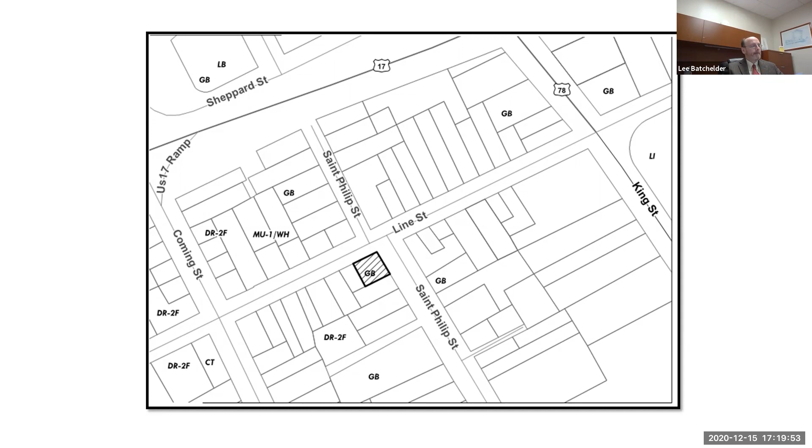Moving on, here's a zoning map. So you see that general business is the zoning for all properties that front on St. Philip in that area, and Line Street in that immediate area. And that GB zoning extends all the way over to King Street and further east. So this is an area with a mixture of uses, lots of residential units, and some other non-residential uses as well, because of the commercial zoning that is allowed.

In this case, the applicant is requesting your approval to build a single family residence on this lot. Now, it's zoned commercially, so it is entitled to conversion of that residential unit to a commercial short-term rental unit, but it's also basically a dwelling unit that can be used that way, but doesn't necessarily have to be.

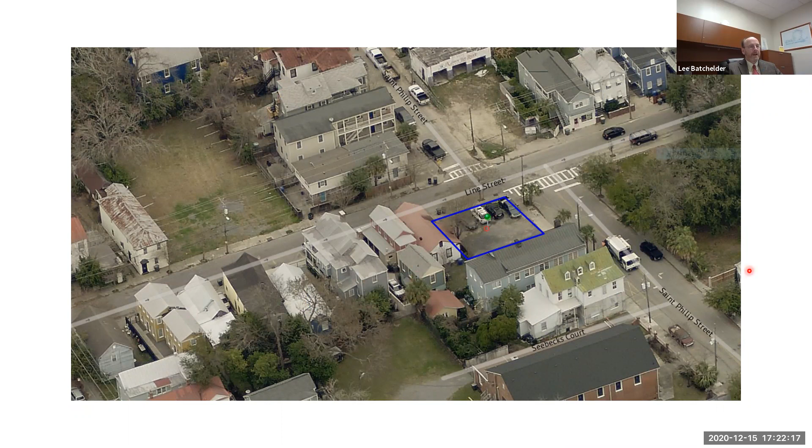Again, here's a view of the property in question. I should point out on this aerial view that you see a lot of other houses in this immediate area, on lots of a similar size. As I move the cursor around, this house over here on Line Street, 79 Line Street, is on a lot that's probably smaller. This is a residential property on a very small lot, and other lots of similar size have residential uses on them, although they're zoned commercially.

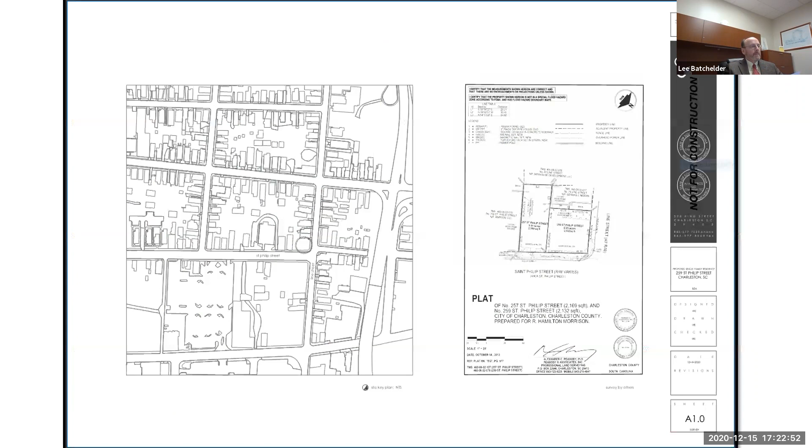This is a site plan showing the lot in question on the left and the proposed site plan on the right. Now I'm going to skip to the next slide, a blow up of the image on the left, to explain this. St. Philip Street runs along the bottom of the screen, and Line Street is on the right side of this plan.

This shows the setback lines required by the zoning ordinance. There's no front setback requirement for the house. There's a 3-foot side setback along the north side property line and a 7-foot side setback required on the south side, and a 3-foot rear setback. The south side setback makes sense given there's a house on the next lot over the south side property line, consistent with the pattern of development where homes are sited close to one side property line and have a larger side yard on the other. So this is how our zoning works.

This triangle shows what we call a vision clearance triangle. When you have a corner property at the intersection of two streets, the zoning ordinance says you can't build anything between a height of 3 feet and about 10 feet within the vision clearance triangle. It measures 15 feet on each leg, and you connect those two points, creating an area where visual obstructions for drivers approaching the intersection are to be avoided or prohibited.

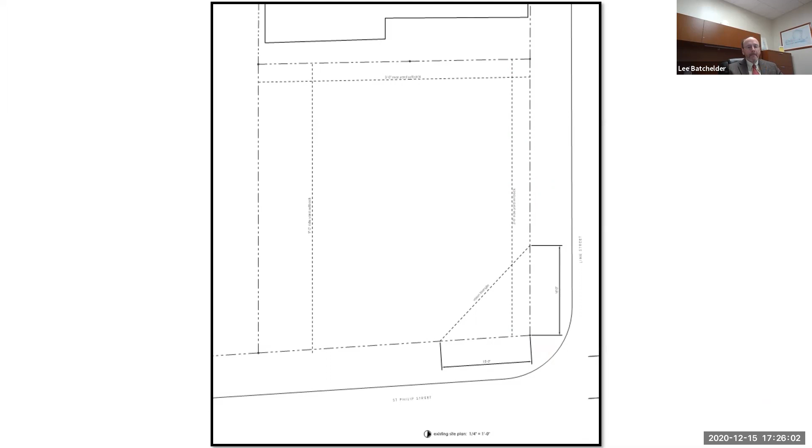Here you have a proposed site plan showing the house that meets the rear setback requirements and the south side setback requirements. However, it proposes to align the house along that north side property line within that 3-foot setback area. So that's the variance listed on your agenda.

The second request is to allow this single family residence to be constructed on a lot of insufficient size. As I pointed out, the lot in question, 259 St. Philip Street, is comparable in size to other lots in the immediate area that do have single family homes on them.

Moving on, this is the design proposal, and I should go back to that site plan floor plan. What's happening here is this is covered outside space on the ground floor, with columns at these three locations so that someone can still look through there and see oncoming traffic on Line Street. That's the purpose of that, and that proposal went before the Department of Traffic and Transportation staff, and they found it to be acceptable.

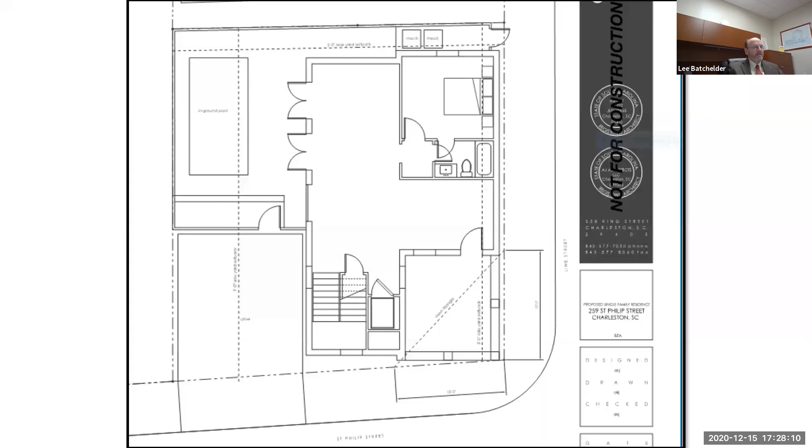So that resolves that vision clearance triangle issue as far as the city is concerned. These are the floor plans. Here's that open area with the front door right here.

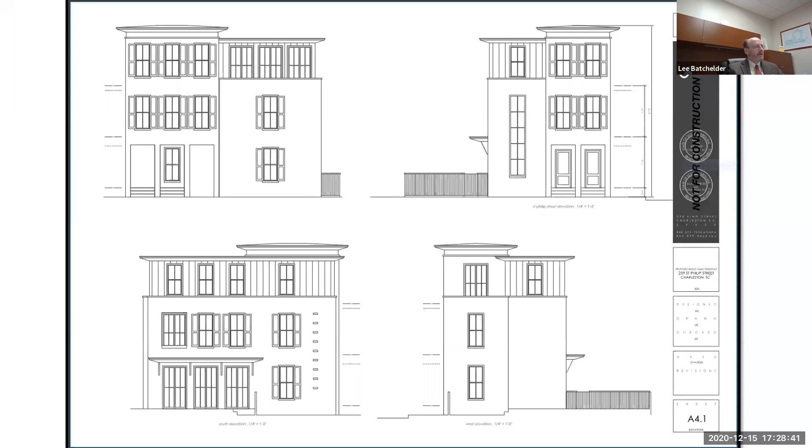And then we get to the elevations right here, showing the proposed design of the house, which will require approval of the Board of Architectural Review before it can be built. So the design may change. It may, I'm sure it'll get more detailed and evolve, but that is the proposal.

And then if I go forward, so these are just some views of the surrounding area. And here's a larger view of the actual corner property. It's been used as a surface parking lot for a number of years, and not a very attractive use, so a house would be a much nicer use of the property.

And again, the lot of insufficient size gives the board the authority to approve a site plan deemed not in conflict with the intent and purposes of the ordinance.

And then the applicant submitted with their application the information about how they feel that they meet the variance test. We agree with their findings here that the intent is to locate the residence along that north side property line abutting the street, so there's no setback. That's the preferred option. And in fact, in this case, they went to the neighborhood association and they have a letter from them indicating that they support this request, and that is from Andrew Gould of the Neighborhood Association.

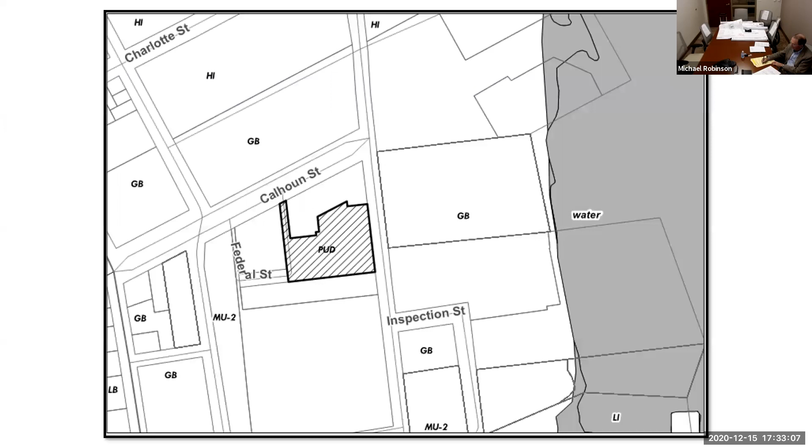Mr. Batchelder: So the applicant is requesting another extension to this vested right that was approved originally a number of years ago. And as I've mentioned before, the law allows a vested right to be extended up to 5 times, provided there's been no change in the ordinances that would preclude or prohibit the proposed use, and that is not the case here. The use is still allowed.

This is a property that's within the accommodations overlay zone. It's actually, the property lines have changed a little bit over the years, but it's actually this piece right here, which is owned by the same people that own this piece, the neighboring piece right here. And that piece on the corner of Calhoun and Concord Street is 7 Calhoun Street. And the approval was originally for a 100-room inn.

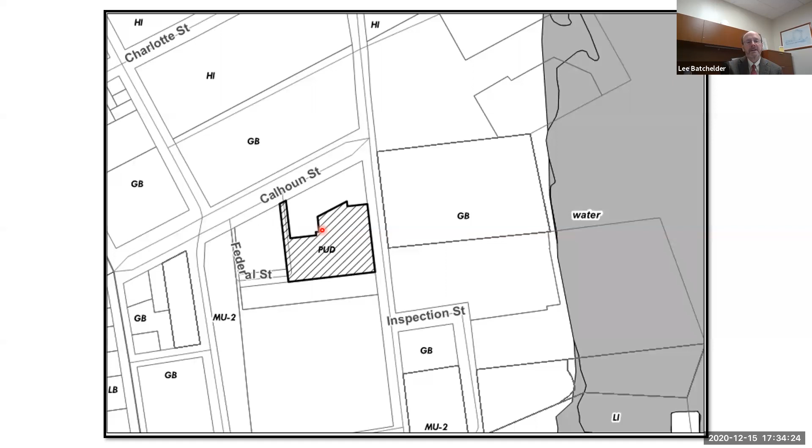So nothing has changed that would prohibit that use from being built today if they wanted to move forward with that project. And we recommend the approval of the vested right, the extension of the vested right to carry it through December 31st of 2021.

The city recommends approval. Ms. Ashby, is anyone present who disagrees with the city's position? No, Mr. Robinson, no one is present. Does the board have any questions for city staff, or are there any motions?

I'll move for approval. Second. All those in favor signify by saying aye. Mr. Morrison, Aye. Mr. Judon, Aye. Ms. Grass, Aye. Ms. Richards, Aye. Ms. Vargas, Aye. Mr. Bennett, Aye. Mr. Robinson votes aye. The motion is unanimously approved. Thank you very much.

Third item on the agenda is item B2, 15 Broad Street. Request a third one-year extension of a vested right pursuant to section 54-962 to extend the approval to December 31st, 2021. The vested right pertains to a variance granted under section 54-301 on June 21st, 2011 to allow 3 dwelling units, with a condition the ground floor can't have any residential use in a limited business zone district.

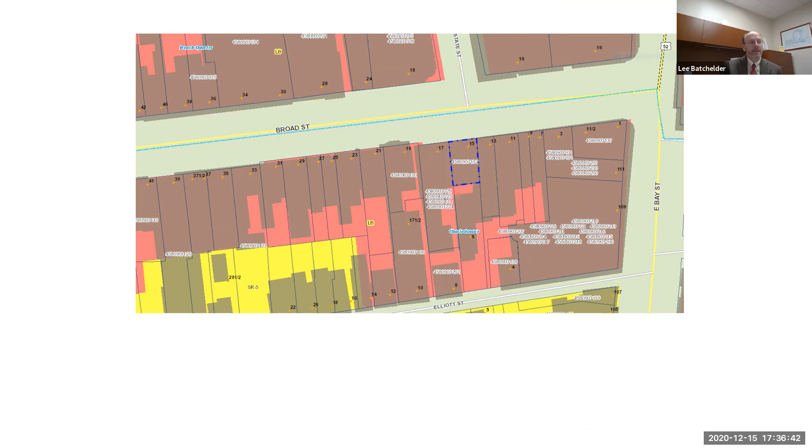The extension is being requested to extend this approval through 2021, until December 31st, 2021. There have been no changes to the zoning regulations that would prohibit or preclude this use, so we recommend approval of the extension. Staff recommends approval. Ms. Ashby, is anyone present who disagrees with the city's position?

No, Mr. Robinson, no one is present. All those in favor signify - any questions, any motions? I move for approval.

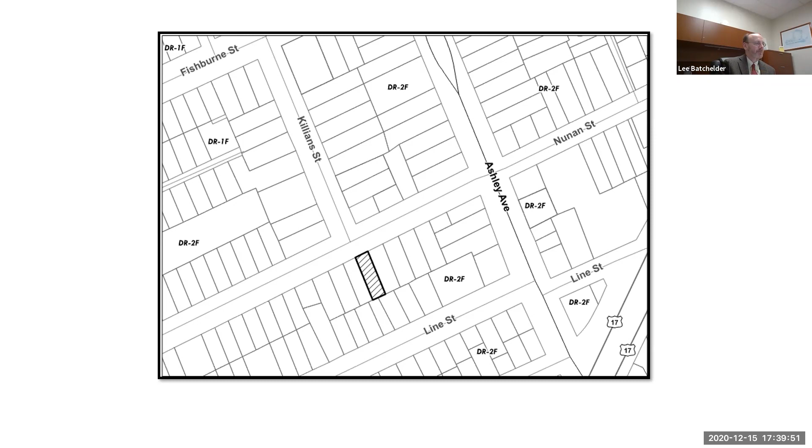31 Nunan Street is a residential property in the West Side neighborhood, located just west of Ashley Avenue. The property, as you can see, is similar in size to the other properties on Nunan Street. Here's a zoning map, and you see the existing building on Nunan Street and the existing residential buildings on the other streets in that area.

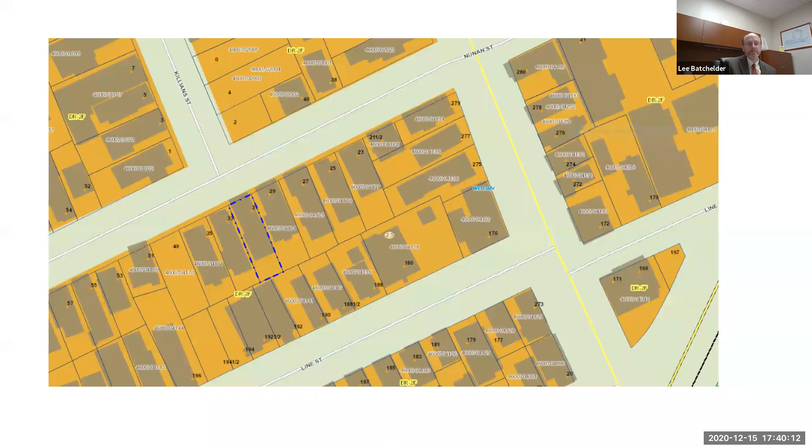The applicant is requesting these approvals to allow him to elevate this one-story house to meet the flood zone requirements, which are pretty significant in this area. In doing that, they are not going to change the footprint of the building except to add stairs to access the elevated one-story house. They also want to make changes to the back portion of the residential property.

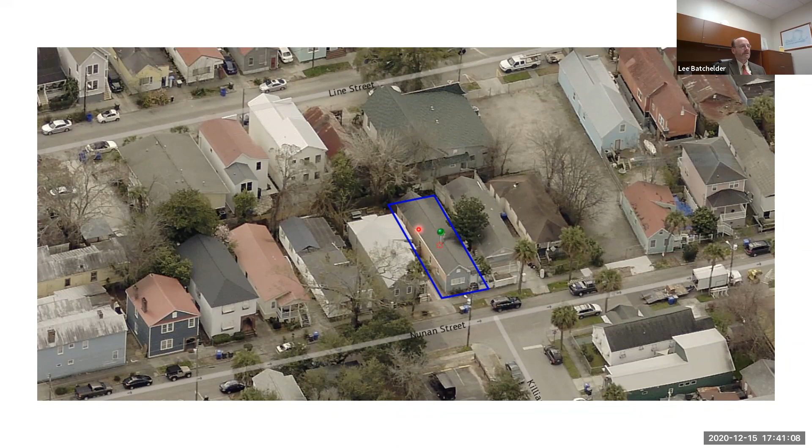So the original house is the front portion, and then there was an addition in the back. I think they are proposing to essentially rebuild that addition in the same footprint, but make some modifications to enlarge the living space. Here's a view of the house from the street.

Existing site plan - this line right here is the lot line. You can see that the house sits right up on the east side property line right now, so there's virtually no setback on that side of the property.

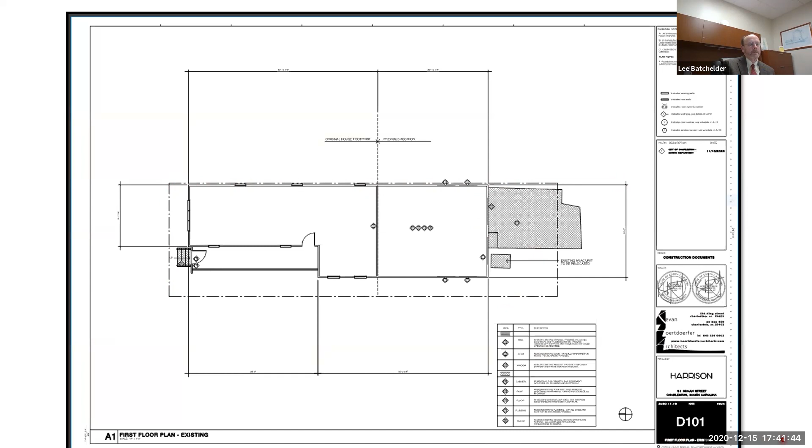This is the proposed site plan. The footprint doesn't change except with the addition of the stairs right here, and these stairs are what require the variance, to allow the stairs with a 2-foot west side setback. The setback over there right now is already just a little over 4 feet, so that stair addition will end up reducing the setback in that immediate area around those stairs, but other than that, it will remain the same.

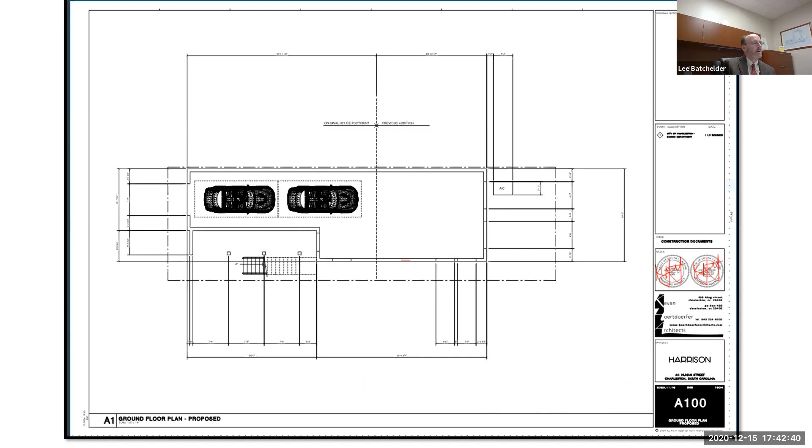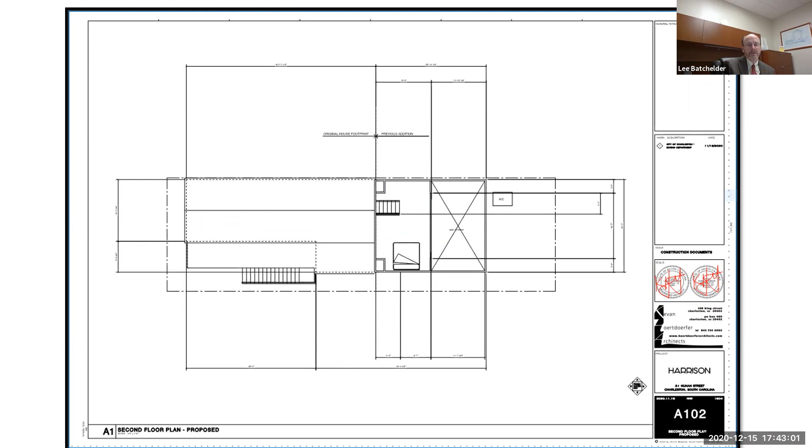And then the interior floor plan. What is being added is a loft area. You see the stairs right here. So in the back, there's a loft for an additional bedroom space up here, and that space is proposed to have a dormer.

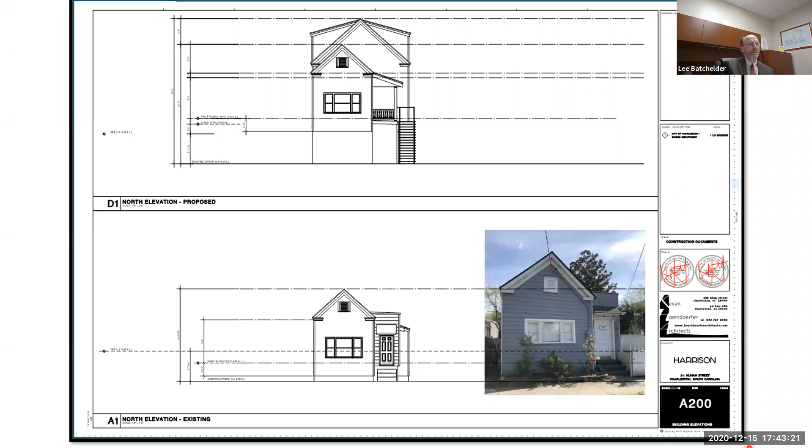So you can see the top elevation is the proposed elevation once the house is raised. And this taller rear portion of the house is proposed to have that loft space, with the dormer on this side, but also the dormer on the east side right here. It's those dormers that require the special exception.

And the most affected neighbor in this case is the neighbor to the east, who would abut the east elevation of this house and have that dormer looking into their yard.

And that neighbor has written a letter dated November 15th to Drew Harrison, the applicant. He says: this letter is to inform you and whomever it may concern that as your neighbor, I've reviewed your plans and give you my full approval to renovate your property as described within those plans, including adding a dormer on the east side overlooking my house. Please feel free to reach out to me at any time for questions or concerns at the above contact information. We're excited to have you in the neighborhood. Chauncey Jordan.

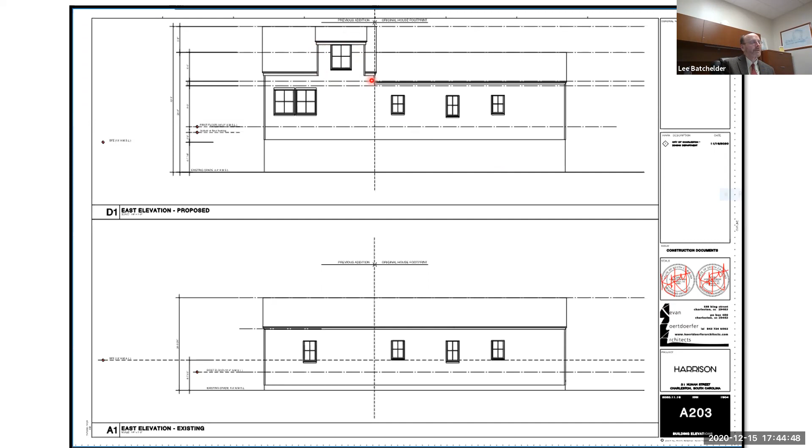And so the most affected neighbor for this dormer addition is saying that they're fine with this, and therefore we feel that it meets the special exception requirements of the zoning ordinance.

This is the zoning ordinance standard for an extension of a non-conforming building footprint. I believe that they meet the requirements. That's limited to extending or increasing the non-conforming use in existence and would not result in an unreasonable intensification of the non-conforming use, based on the standards that you have to apply to this, which mainly in this case would deal with light and air impacts.

So our recommendation for this request is for approval. Staff recommends approval. Ms. Ashby, is anyone present in opposition? No, Mr. Robinson, no one is present.

Are there any questions from the board or any motions? I have one question. Lee, I just have a question about the overall impact of flooding as it relates to these types of applications. So raising these houses, is that just something that in the foreseeable future is going to have to happen? And do you feel, or is it any sort of concern as to what that does to the other houses in the area that aren't raised? I'm just curious how that works. So on this street, this one house will be raised and the rest of them aren't?

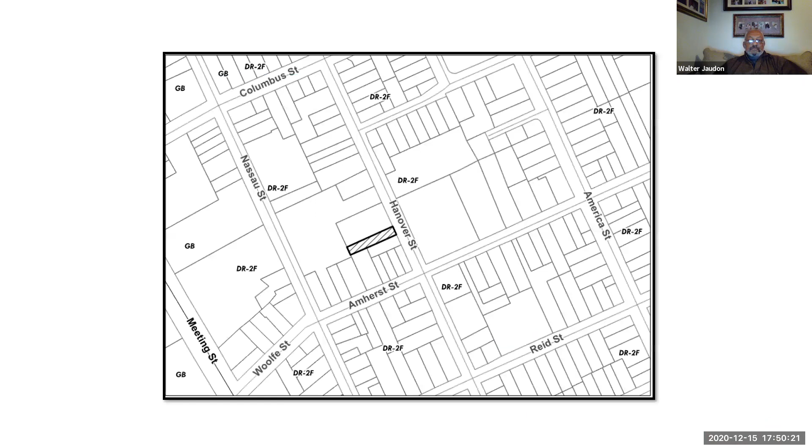This is a property for you. It's located on the east side of the peninsula in the East Side neighborhood. It is north of Amherst, west of Hanover, and south of Columbus Street.

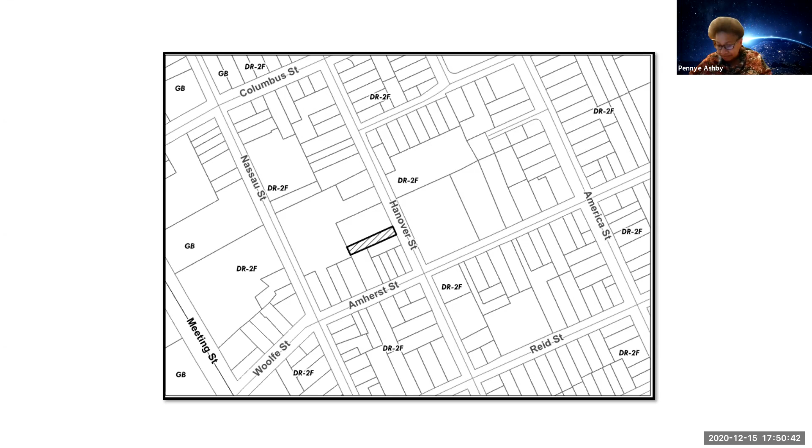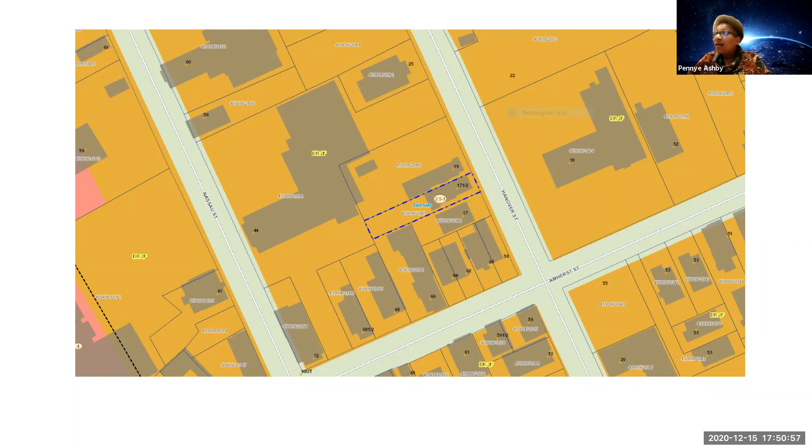I just wanted to emphasize that the duplex use is not an issue before this board.

Looking at the site plan, it may be a little hard to read, but we have an existing building, which is a single family residence, and to the rear is proposed a 2-story addition. The horizontal expansion, the building becoming larger, will provide 2 bedrooms, 2 bathrooms, and a deck. The vertical extension is the same configuration: 2 bedrooms, bathrooms, and a deck.

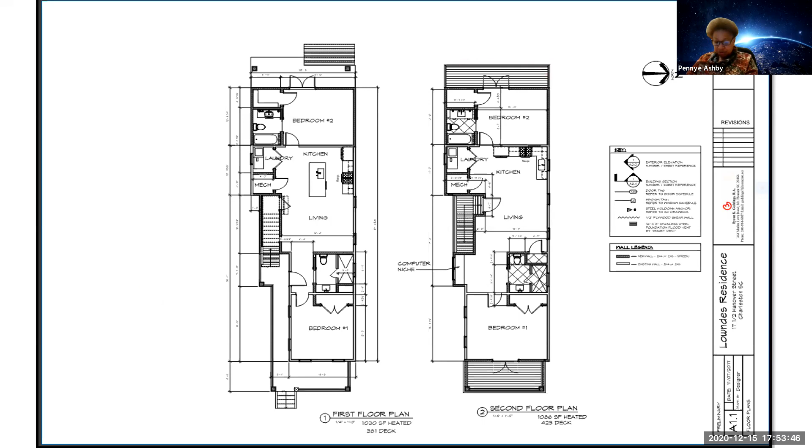Again, the issue of the 2 units is not the issue. Next slide.

These are the elevations of the proposed addition: the front elevation, the left, the right, and the rear. You can see the deck as it is shown on the ground level and on the 2nd level. Next slide.

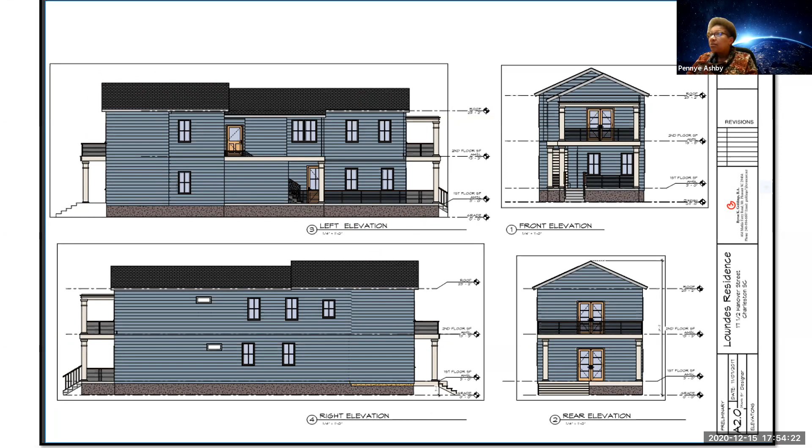The issue before you tonight is based on section 54-110. The expansion of this building to provide a little more heated space, which is the rear 2-story addition that extends into the existing side setbacks on the north and south side, is governed by section 54-110.

Being that this building is increasing in size, this becomes an issue of intensification. This section governs any nonconformity, and the nonconformity regarding this particular property is the building's footprint. This building is non-conforming because it encroaches into the setbacks. So any addition proposed has to be reviewed and approved by this board.

Staff does not feel that having a slightly larger building will result in an unreasonable intensification, that would adversely restrict light and airflow onto the adjacent properties, or cause noise or fumes, and parking is not an issue.

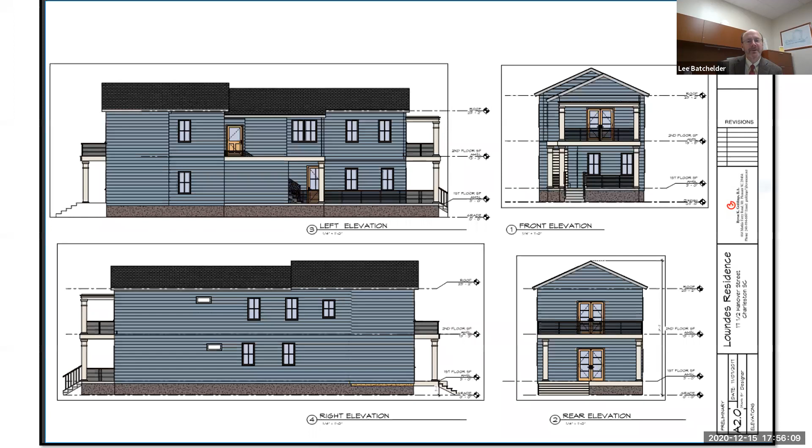I believe that the PowerPoint shows two views of this house from the street. Mr. Batchelder, oh, the photographs, this one? Okay, that's fine.

There is a house that is to the south of this property, referenced as 17 Hanover. This house actually sits further back from the front property line, and it also does not sit on what would be the north side setback. Yes, that's the house in question.

There's a fence line between 17 and 17 and a half Hanover. 17 Hanover, which is set back from the front street, is not right on the property line. The subject lot, 17 and a half Hanover, does have a setback from that south side property line. It is not conforming, but it is at least 3 feet.

Mr. Batchelder, will you please go back to the site plan? Oh.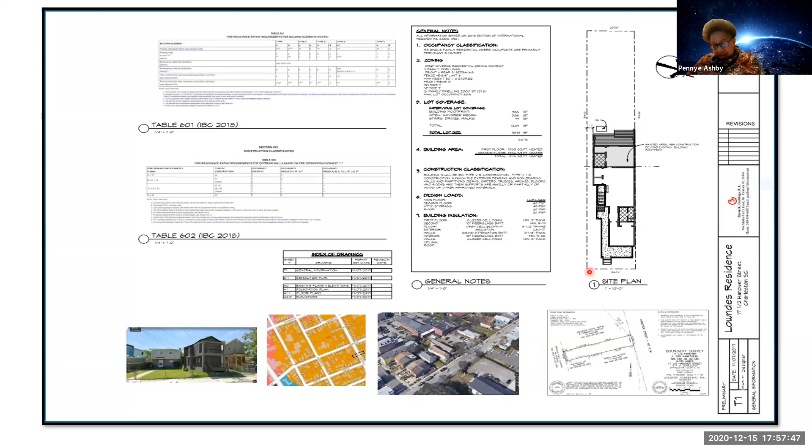19 Hanover Street is to the north. Looking at the photo, it would be the property to the right. This property is currently a duplex. The use on this lot was approved by the Board of Zoning Appeals back in April of 2003. This property is owned by the Ebenezer AME Church, which has provided affordable housing on lots that they own in this community.

Mr. Batchelder, will you please go back to the section that governs this? Section 54-110, the non-conforming use ordinance. Oh, I don't have that. Forgive me, please. There we go. Yes, reading what has to be considered per this section.

Under 54-110, in considering the reasonableness of the intensification of the extension or increase, the board shall consider the effect of the extension or increase on properties in the vicinity, to include traffic impacts, vehicular and pedestrian safety, parking impacts, potential impacts of noise, lighting, fumes, or obstruction of airflow or light onto adjoining property, and also impacts on the aesthetic character of the environs.

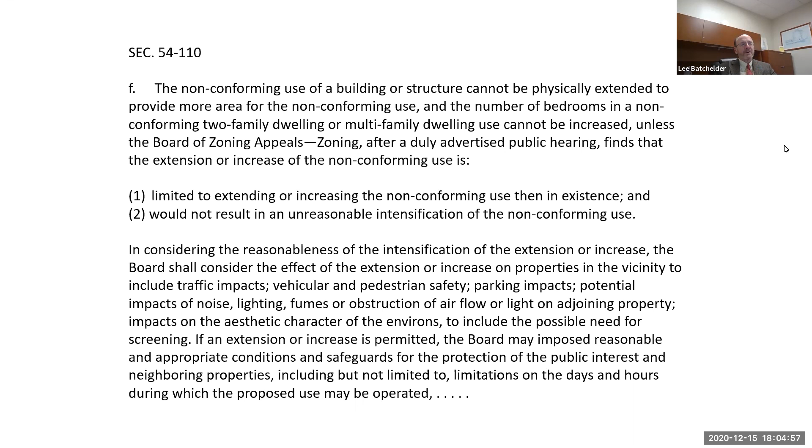That helps a lot. Thank you and good evening, everyone. And if there is anything that you'd like to say, I guess the chair or I can swear you in. Please do the honors, Mr. Batchelder. Okay, Mr. Geddings, do you swear to tell the truth, the whole truth, and nothing but the truth, so help you God? Yes, certainly do.

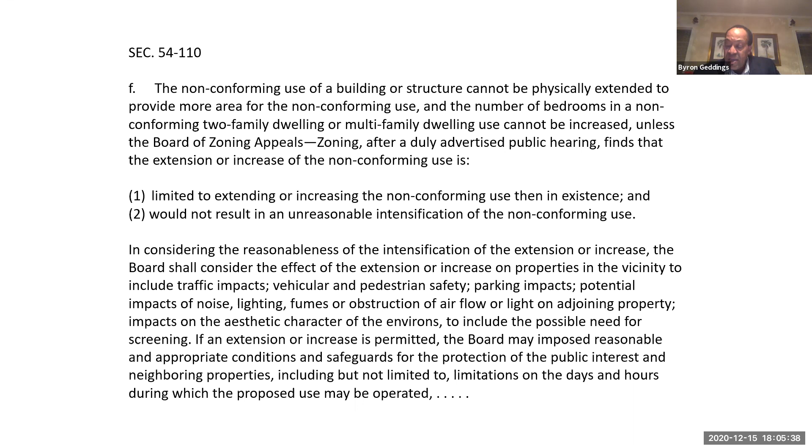This project is interesting in the sense that the existing building, the house, is very old, built in 1915, but it has suffered several renovations over the years. The condition of the house now is very poor. As you can see, there is some dilapidation, and the rear left wall has been falling away from the building. The owner has put a tarp over it to protect it from water getting into the building. It's in need of a restoration that brings it back closer to the character of this type of home, and I think this project is a good project to do it.

We are intent on honoring the architectural character of the neighborhood with our proposed design, and also modernizing the property appearance a bit. The floor plans are made so you can have various accommodations of affordable housing for tenants that meet that income level. If you envision single parent families, the need for a second bedroom is very important, so you could have a parent bedroom and a child bedroom, which has to be separated under this program if they're opposite sexes.

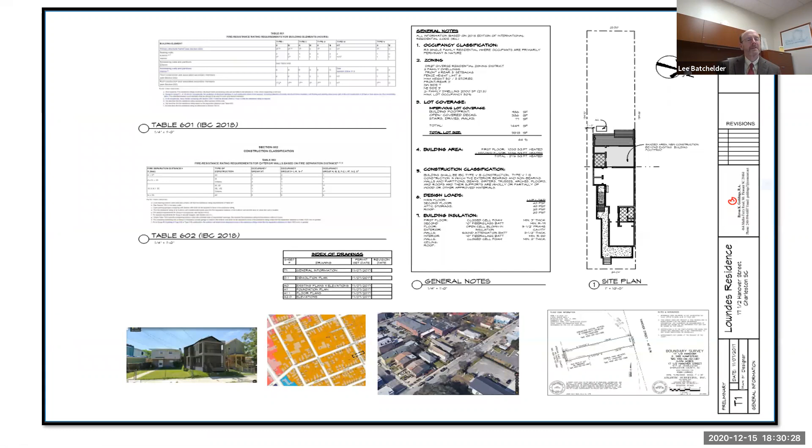Okay, so moving on, I had to move everybody back to an attendee.

7 State Street. So 7 State is a commercially zoned property, zoned limited business. It's just north of Broad Street, actually just north of the People's Building property at Broad and State Street.

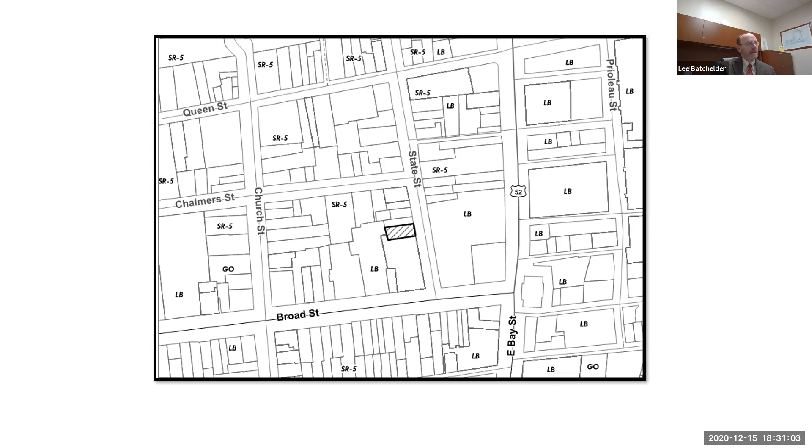It has a 2-story building on it. And you can see on this zoning map, it's a little bit hard, but limited business extends along Broad Street, and it includes this one property on the west side of State Street. Beyond that, all of the properties are zoned residential, although there are commercial uses in some of these properties.

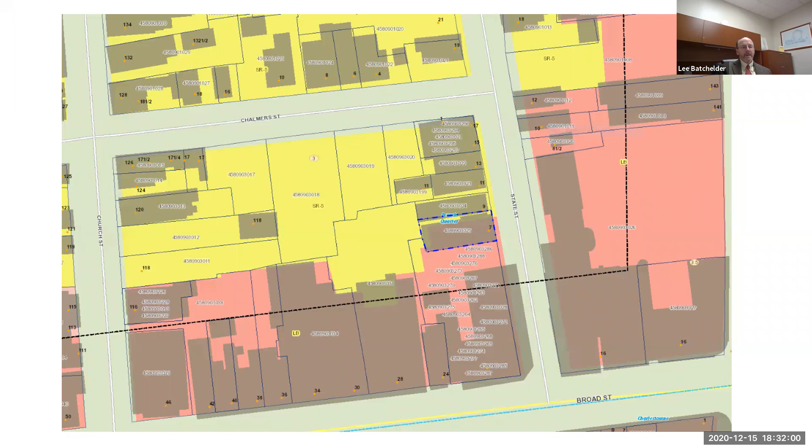Actually, most of the properties in this block of State Street on that west side have some commercial uses in them. And then on the east side of State Street, you see that the limited business zoning extends further north all the way up to where Chalmers intersects State, one block off Broad. So that is the zoning map.

And the request is to allow this property, which has, as you can see here, a 2-story building on it, to allow that property to have 2 residential units. One unit is fine - they could have one unit occupying both floors, but they would like to have 2 residential units, one on the ground floor and one on the second floor.

And they have reached out to a number of other property owners in the immediate area, as well as the neighborhood association. And we have letters of support from a number of people, and I'll go through those in just a minute. But moving on.

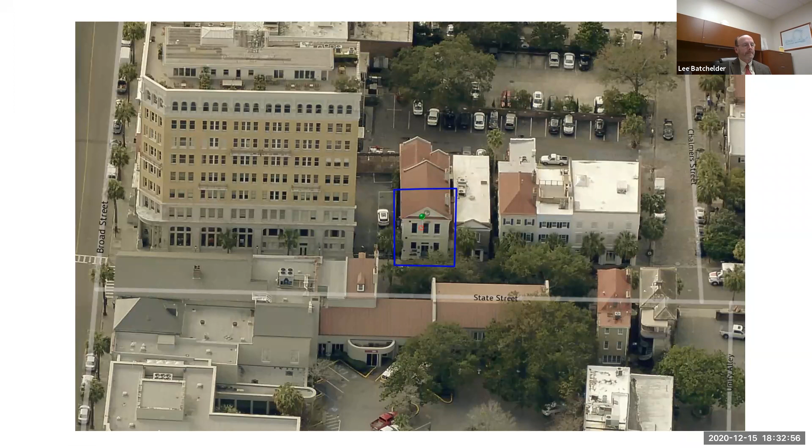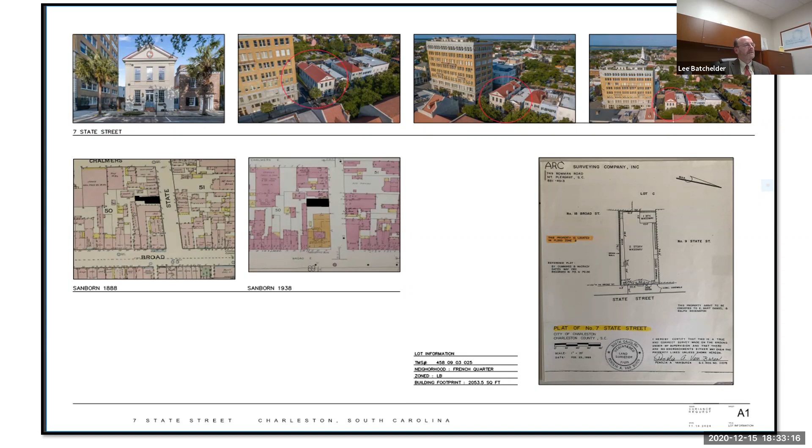These are some old Sanborn maps just showing the location of the property. The building itself, I think, dates to the early 19th century, according to Jonathan Poston's book. Here's an up-close view of the building, beautiful building.

And these are photographs that show, number one, you see the main entrance into the ground floor right here. There's also a doorway right here on the side, and that's another view of that doorway leading into what is essentially a hallway and staircase to go up to the second floor.

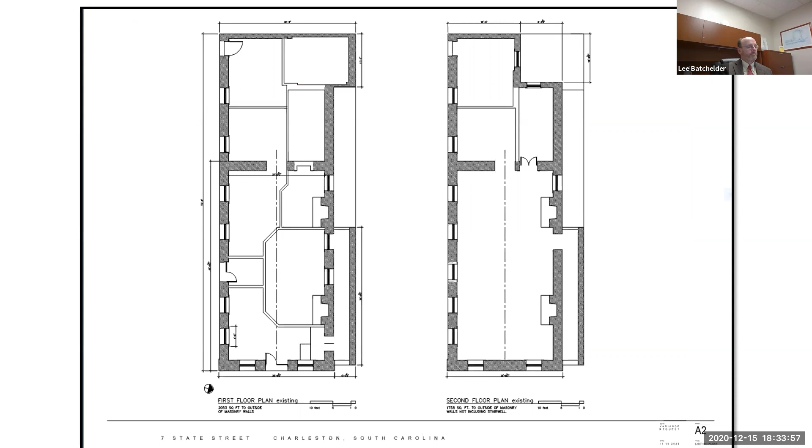These are floor plans, existing and proposed. Perhaps, well, I'm not sure, maybe that staircase is not there today, but they can add it back into that space. But you can see that they would take the ground floor, make it living and kitchen up front, 2 bedrooms in the back, and basically the same layout upstairs with a living space and a kitchen in the front, and then 2 bedrooms in the back.

So each unit occupies a floor, 2 units total. The lot is only large enough to accommodate 1 unit. In the City of Charleston zoning ordinance, generally speaking, the number of units you can have on a lot, when the lot does allow multiple units, is based on the size of the lot. So the variance is to allow 2 units on a lot that doesn't quite meet the requirements for the lot size.

And the letters of support that they have obtained are as follows. So the letter from Susan Bass, the president of the French Quarter Neighborhood Association. I'm going to read these, they're short.

As president of the French Quarter Neighborhood Association, I'm writing to let you know that our board has voted to support a zoning variance for 7 State Street, a building owned by Messrs. E. Bart Daniel, Joseph P. Griffith Jr., and Matthew R. Hubble to revert to residential use for the property. As residents of the French Quarter, we always welcome reversions to residential from commercial. We believe that having 2 residential condominiums at this property would be an enhancement to the neighborhood, and we would be in favor of such a zoning variance for 7 State Street. We would also strongly support a single-family residential use. That's Susan Bass, president of the French Quarter Neighborhood Association.

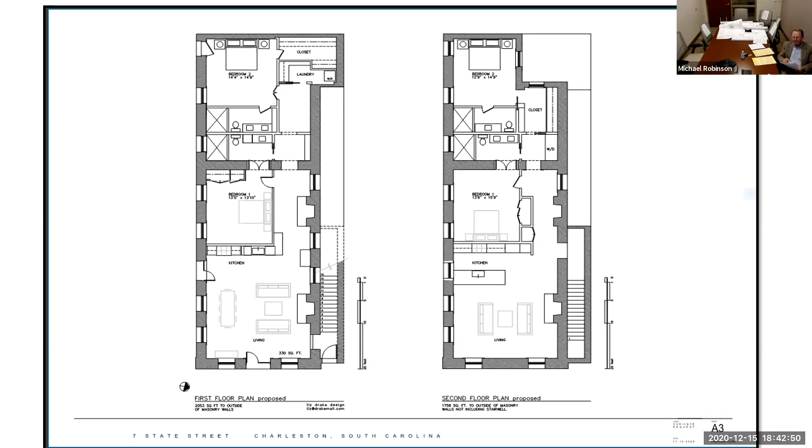Next item on the agenda is 38 Queen Street. Request a use variance for section 54-203 to allow an art gallery on the first floor in an SR5 single-family residential zone district. Request special exception under 54-511 to allow 1,150 square feet of gallery area with 1 off-street parking space, 3 spaces required, zone SR5. Mr. Batchelder.

So this does involve a use variance, so a two-thirds vote in favor of the request for a use variance is required.

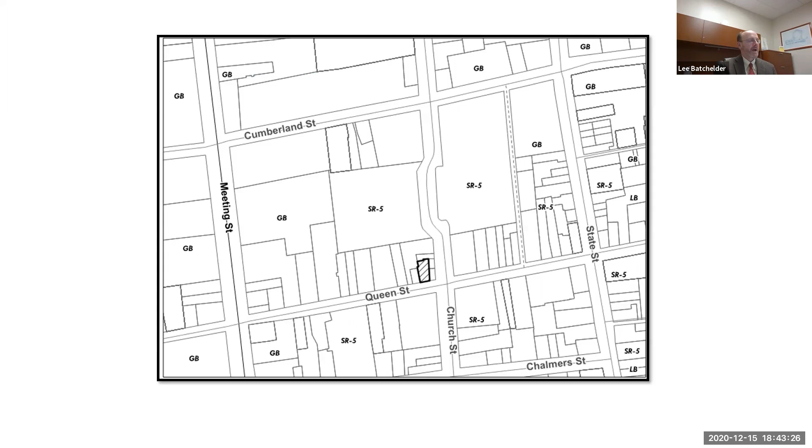We have a commercial parking lot over here. Let me turn this laser pointer on. So we've got a commercial parking lot here, and some commercial uses within some of these buildings. This is an office right here, I believe. And then we've got the Dock Street Theater directly across the street. We've got the Huguenot Church on this corner, St. Phillips Church on this corner, and a graveyard to the north, and Footlight Players Theater right over here. So this is a real mix of residential and commercial uses, very compatible commercial or non-residential uses.

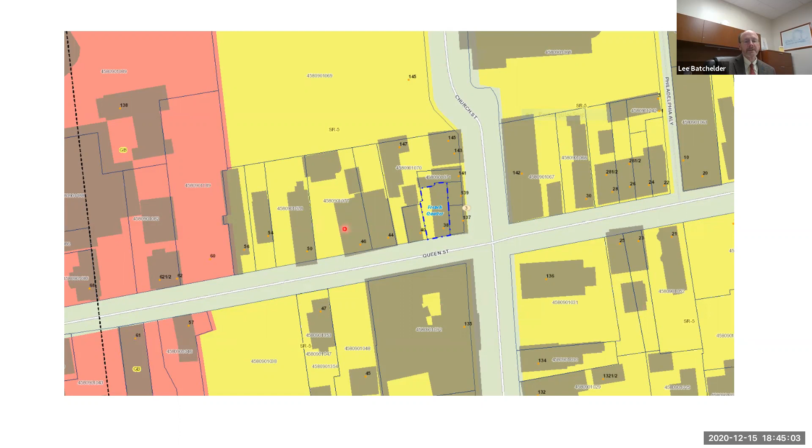There is a history of this property having this non-residential gallery use. In fact, I can recall when I first moved to Charleston in 1987, I lived adjacent to this courtyard, and there was a gallery on the ground floor of this building back then, which existed for a number of years as a framing shop, gallery, that sort of thing. More recently it became an office for an interior designer.

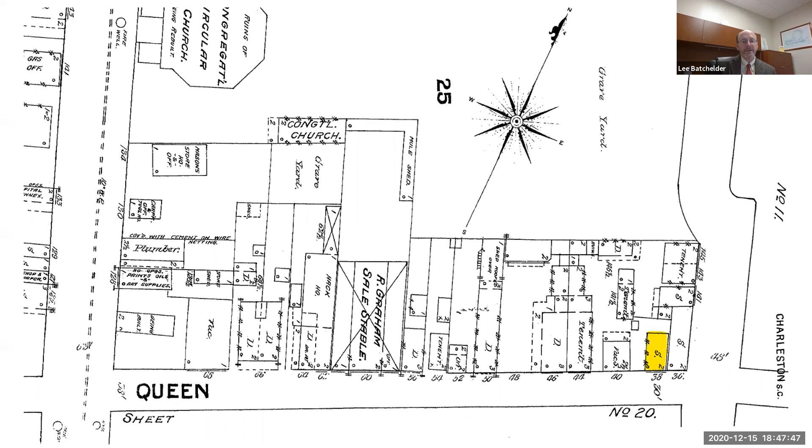So it's had a variety of uses over the years, but there has been a gallery use for a number of years in this building, just not recently. That non-conforming use of the property was lost because of the residential zoning. I went back and looked at the old Sanborn maps. This is from 1888, and the S designation for this building indicates it was some type of store back then, probably store on the ground floor and residential unit upstairs. But at least there was a commercial use in the building even back then, so it's got a long history of non-residential uses. The applicant is requesting the use variance to allow the ground floor to be used as an art gallery space.

Primary hours of operation, as indicated by the applicant, would be Monday through Saturday, 10 a.m. to 5 p.m., with occasional 10 a.m. to 8 p.m. hours.

And then upstairs, there would be an apartment, one residential unit. So that is the request.

We have a number of letters of support that I'll be happy to read into the record, and I'm just going to summarize these. This is a letter from Susan Bass, president of the French Quarter Neighborhood Association. She writes that our board has voted to support a use variance for 38 Queen Street to allow an art gallery on the ground floor. The applicant, Lee Corrigan, is proposing to purchase the building and operate it as an art gallery on the first floor. Our support of this use variance is conditioned upon the art gallery use only, and operating within the usual 10 a.m. to 5 p.m. hours, with 2 or 3 exceptions to operate until 8 p.m.

Then we have a letter from Chisholm Leonard, who writes that he and his wife had lived at 25 Queen Street, the property on the eastern side of the Huguenot Church, for 27 years, and that he is in support of the applicant bringing her gallery back to Queen Street. He points out that the property has previously been zoned to support a gallery, and she is just the kind of person and gallery owner that this neighborhood should support.

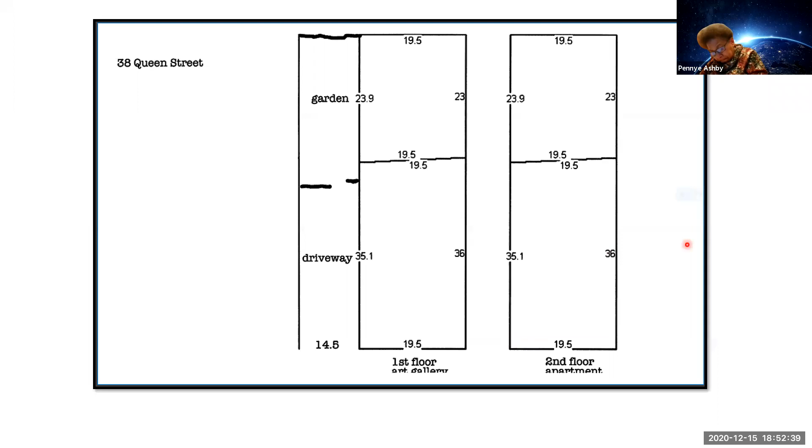So those are the conditions that we would recommend be attached to any approval from the board, and I don't believe there's any opposition. Is that correct, Pennye? You're correct, Mr. Batchelder, no opposition. Staff recommends approval, and there is no opposition. Any comments, any questions, any motions from the board?

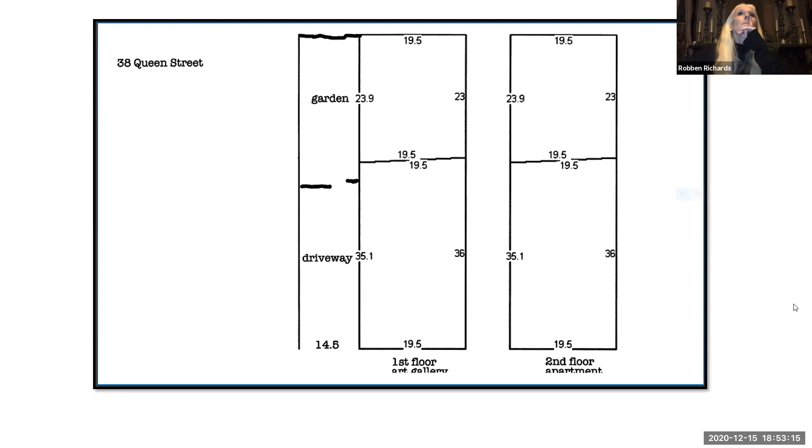I was going to meditate in the front room until 8. Who's that talking? 6:30. Okay, yeah. What was that, Lee? Oh, I'm not sure where that's coming from. Yeah, I don't know where that's coming from, but anyway, well, let's try it again.

Staff recommends approval with conditions, and there is no opposition. Any questions or comments or motions from the board? I move that the motion be accepted with all the conditions. Is there a second? I second. Good, all in favor signify by saying aye. Mr. Morrison, aye. Mr. Judon, aye. Ms. Grass, aye. Ms. Richards, aye. Ms. Vargas, aye. Mr. Bennett, aye. Mr. Robinson votes aye. The motion is unanimously approved.

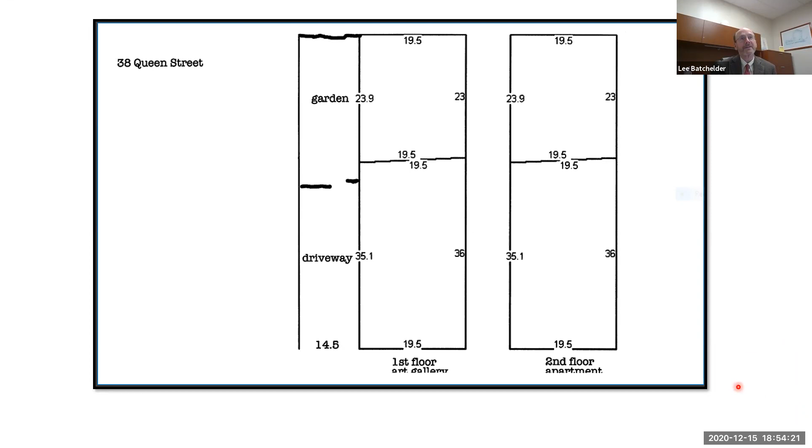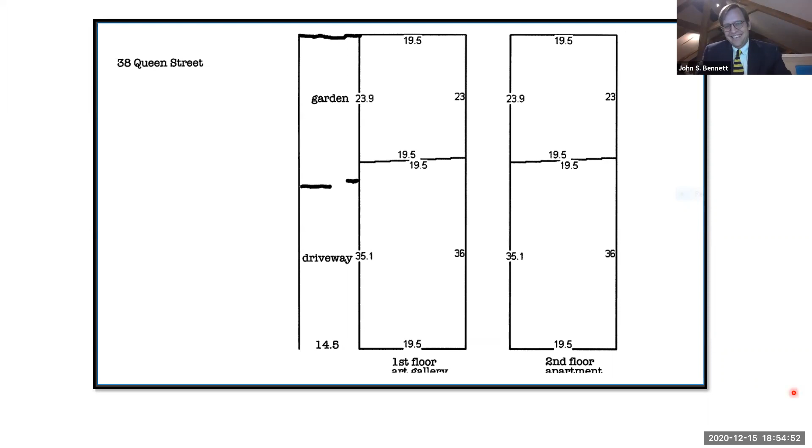Lee, yeah, yes, thank you. There's another good reason for the staff to recommend that change on State Street. All of Matt Hubble and Bart Daniels' clients are accused criminals, and they won't be traipsing in there anymore. It'll be a definite improvement to the neighborhood. Hal, they haven't been taking business from you, have they? That's gonna be a vast improvement to the neighborhood. I'll tell them you said that. I think we still have guests.